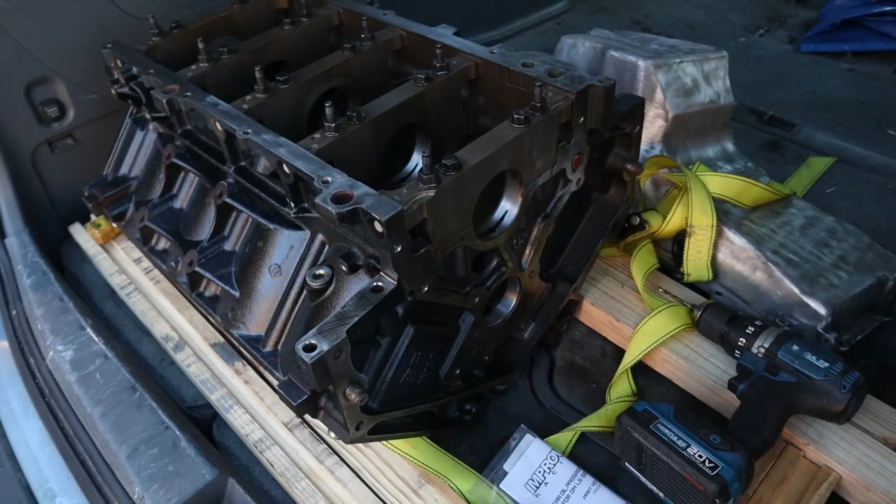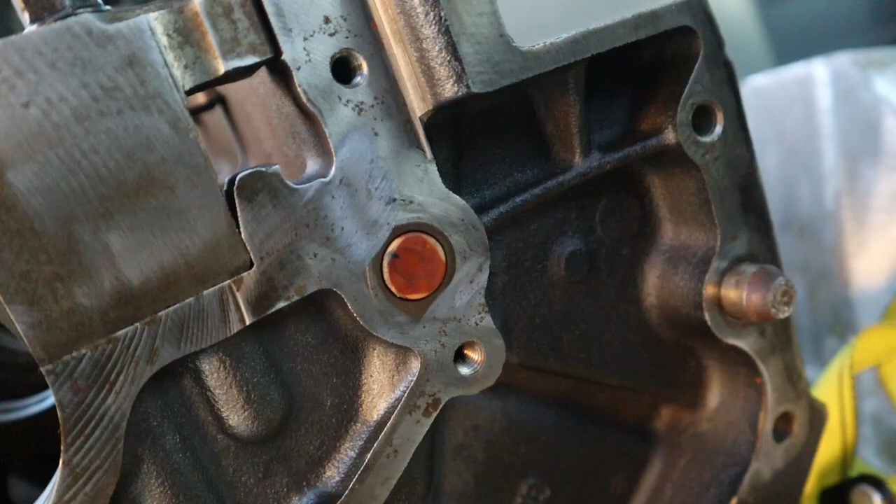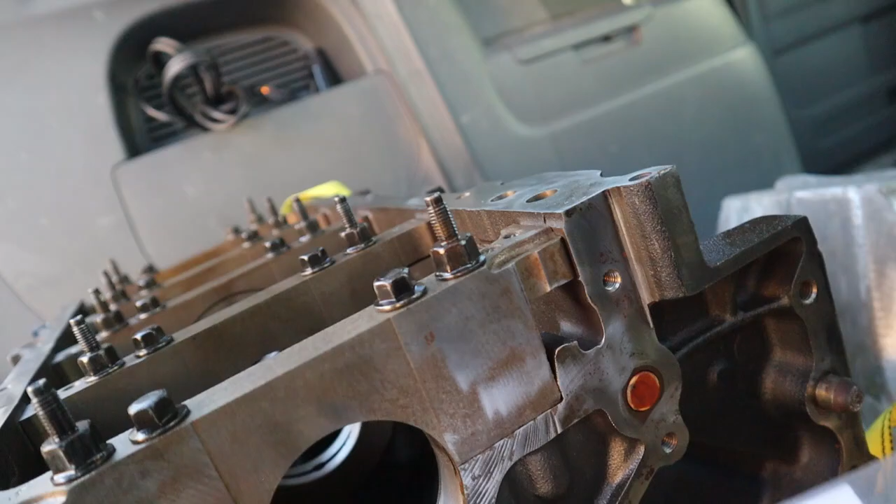As you can see, the block is sitting here. It's actually Friday, March 3rd, and you see this barbell here. I'm gonna take that out. I don't know if they replaced it when they refreshed this block and bored it out and everything, but I'm gonna replace this factory one, which is a good barbell, with this aftermarket barbell right here. Let me open it up for you guys and show you what it looks like and what it does.

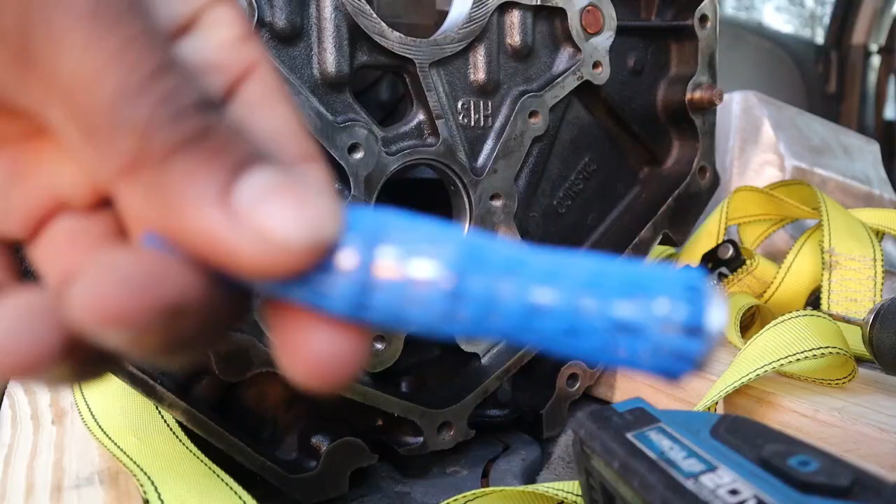Okay, so if it'll focus, there we go. This is the barbell here. It has two O-rings instead of just one that's in here. This basically helps the oil flow through the block and keep oil pressure inward, I guess. If this goes bad, then you'll lose all oil pressure.

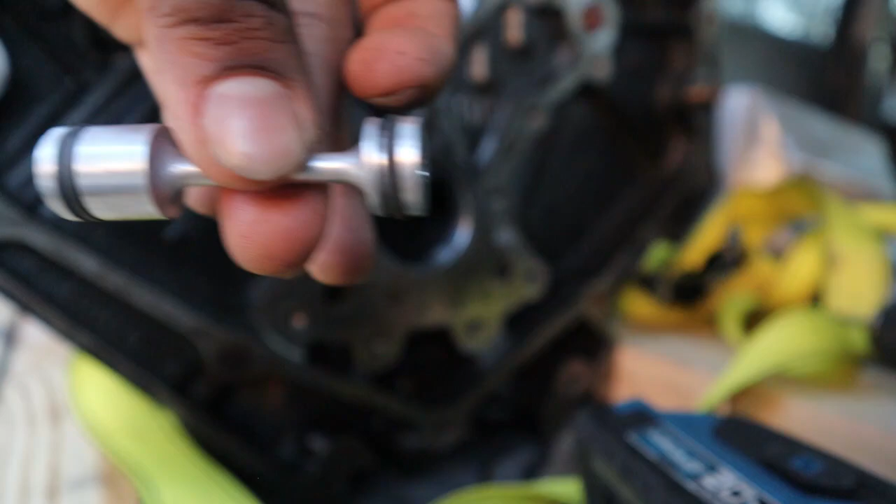I'm gonna oil it up just a bit around these O-rings, and we're gonna slide it in like that. It's gonna go in the block like that. Now first...

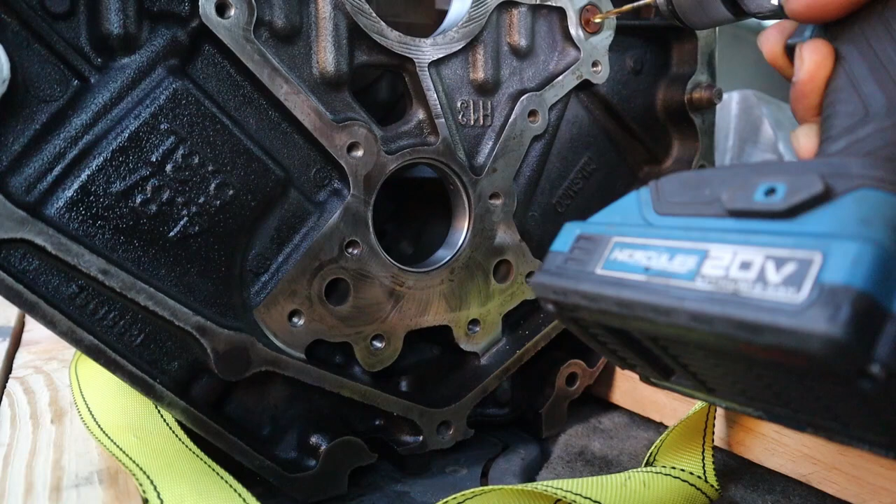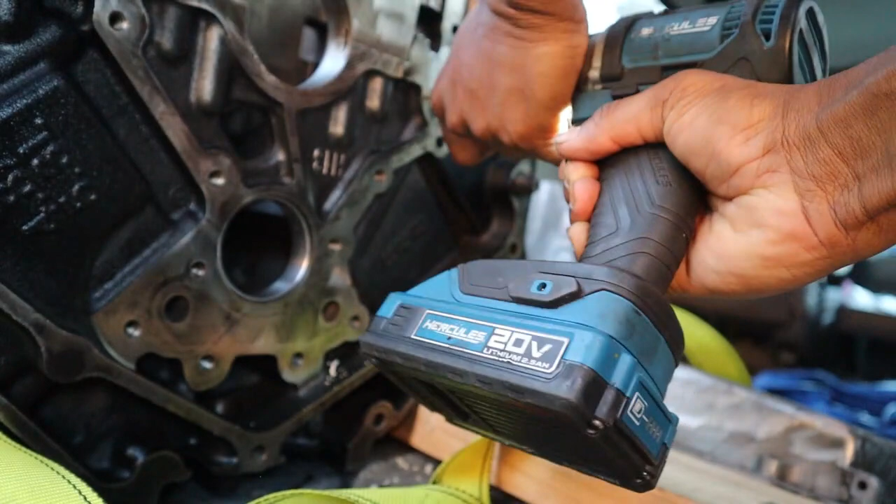Before we do that, we're gonna take this old barbell out using a drill bit. Here we're just basically gonna drill this in, and then we're just gonna kind of slowly shake it outward. So that's what we're gonna do. Okay, take this out. Come on, come on. There we go. Just shake it side to side, and it comes on out.

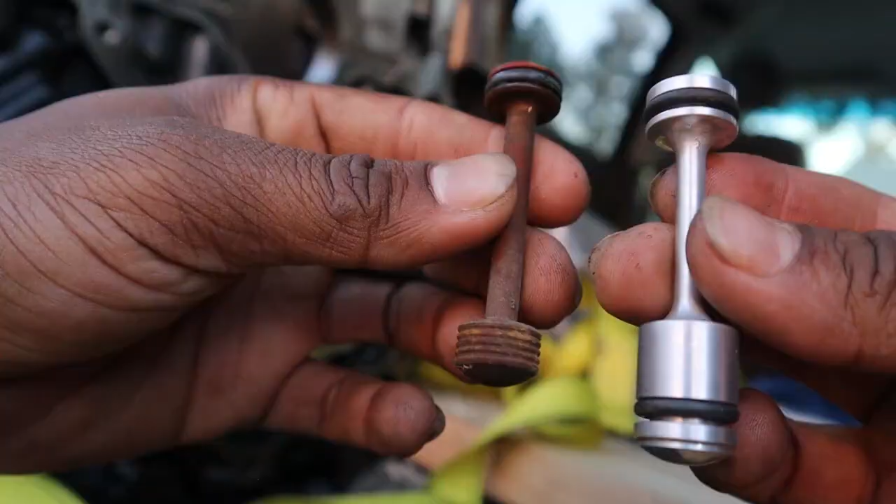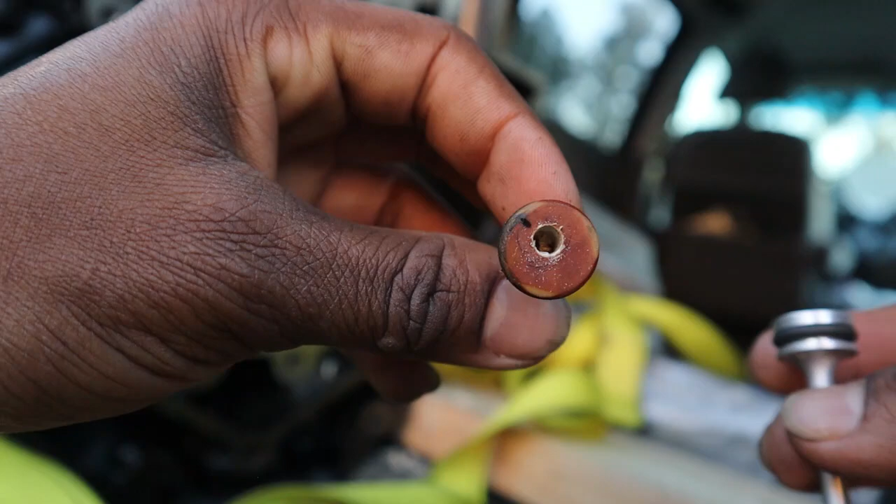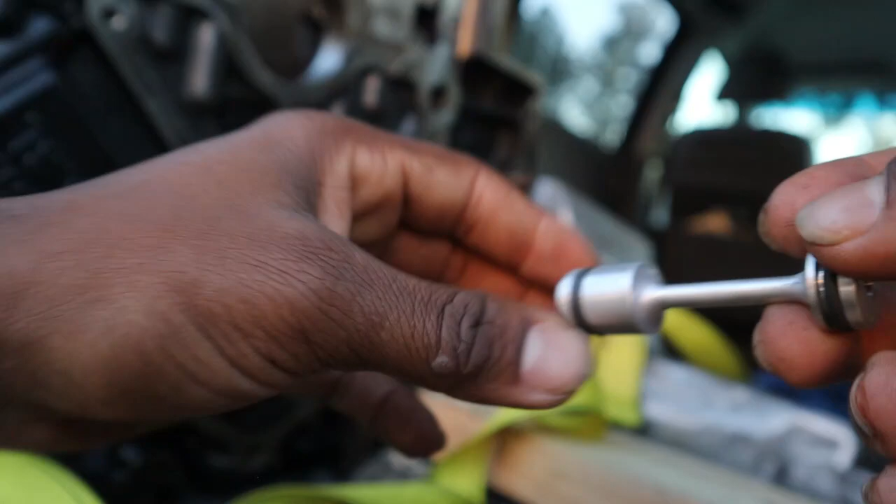There's the difference there. When you're rebuilding an LS engine, you might want to do this anyway, just for better oil scavenging, I guess, and whatnot. You see how I drilled a hole in this one. This one already comes with a hole in it with threads inside of it, so you can put a small bolt in there and screw it on and pull it out with some pliers or something, without doing this from the factory. So yeah, let's put this on.

Okay, we're gonna put the new one in. Sometimes these things are super tight to get on there, but this one's doing good so far. There we go. And that's pretty much it, guys. So let's continue with the video.

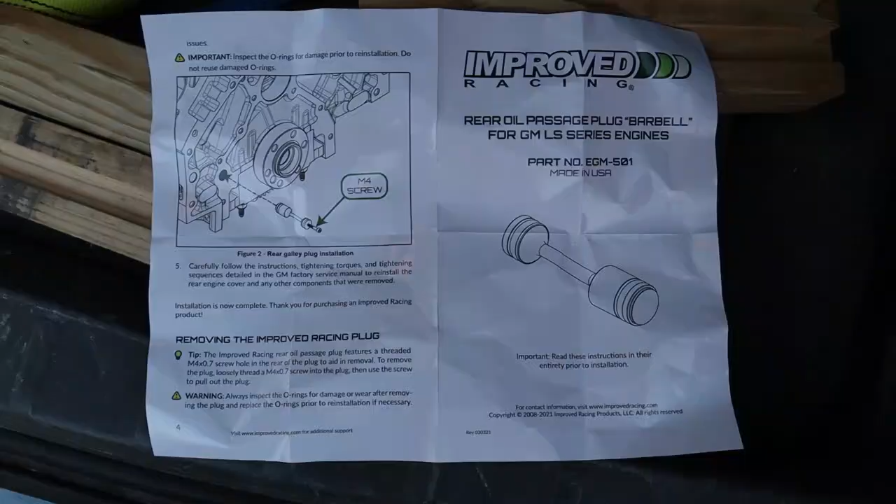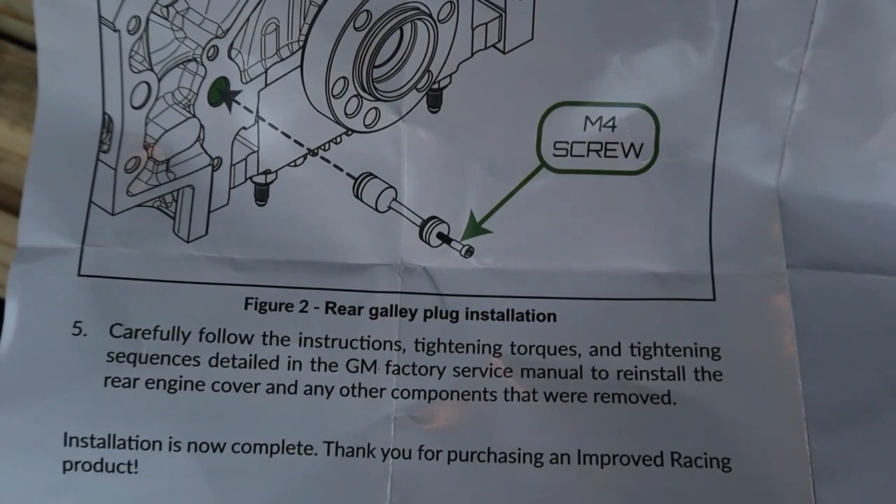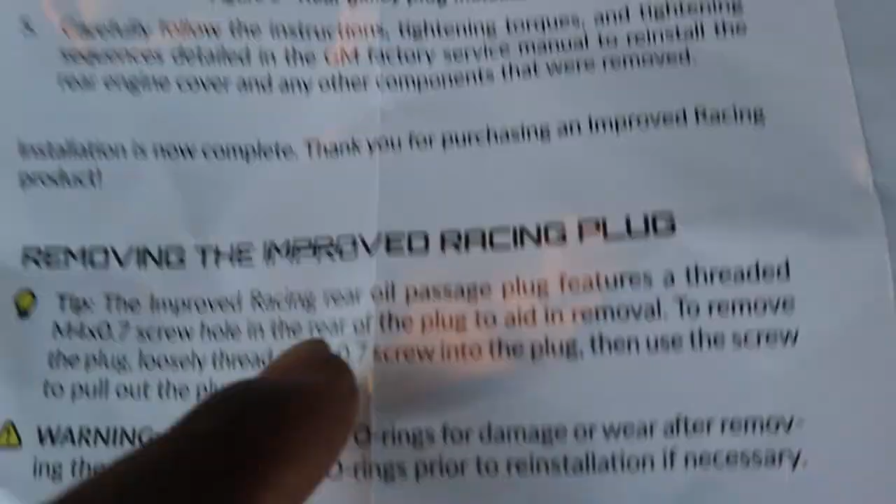I forgot to show you guys that they give you instructions too. Here's a picture of it, the way that it goes in. By the way, this is the back of the block here. It says rear oil passage plug barbell for GM LS. Get you to read that. You can pause the video if you want. And they show you what type of bolt you need to screw on that barbell there. So let's see, there's more information. I'll get you guys to look at that.

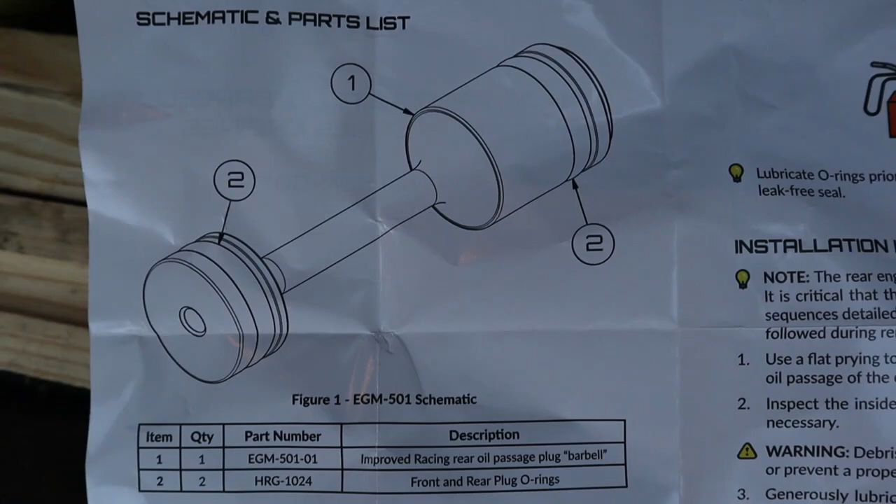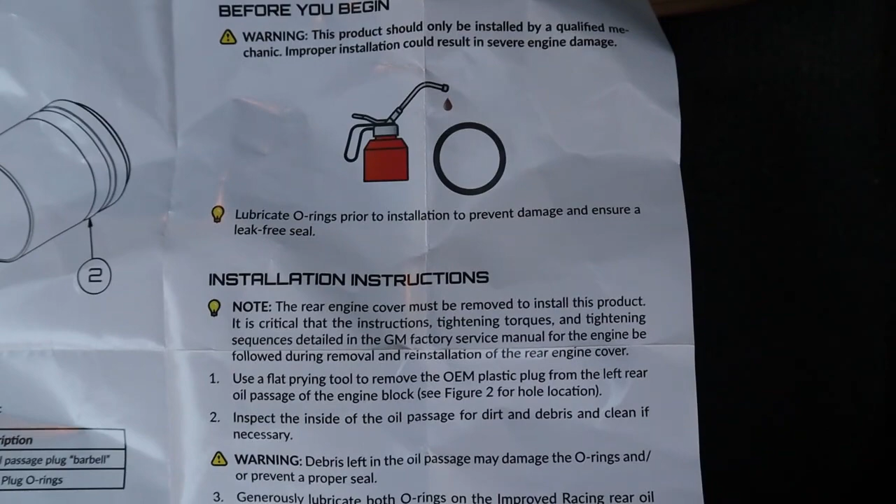Okay, and then I already, like I said, I put oil around the O-ring before I installed it. I actually put break-in oil from O'Reilly's and placed it on the O-ring. That way it doesn't dry up or anything, or have a dry startup or anything like that.

So yeah, greatest hits here again. I'm back after a little over a month. It's been hell for the past month or so, just trying to get the block over there and everything else, which is the easy part. Getting it inspected, honed, and bored, or whatever, and all that. So this is my new slash used block that I bought from the machine shop.

The other one that I bought off of Facebook, that block was cracked when I took it to the machine shop and they got it all cleaned up. They noticed the crack, and it was ruined. They couldn't fix it. It was on the deck surface here. I believe it was on the driver's side, on this side. So... I was not happy about that.

So I took my cylinder heads back. I just got them cleaned up. They're not ported or anything, but just got them cleaned up a little bit, and I'm just gonna wait on that, since this build is going to be kind of slow. I just want to make sure I'm doing everything right and that I'm not screwing nothing up, which I might, but that's part of learning and part of doing an engine build for the first time.

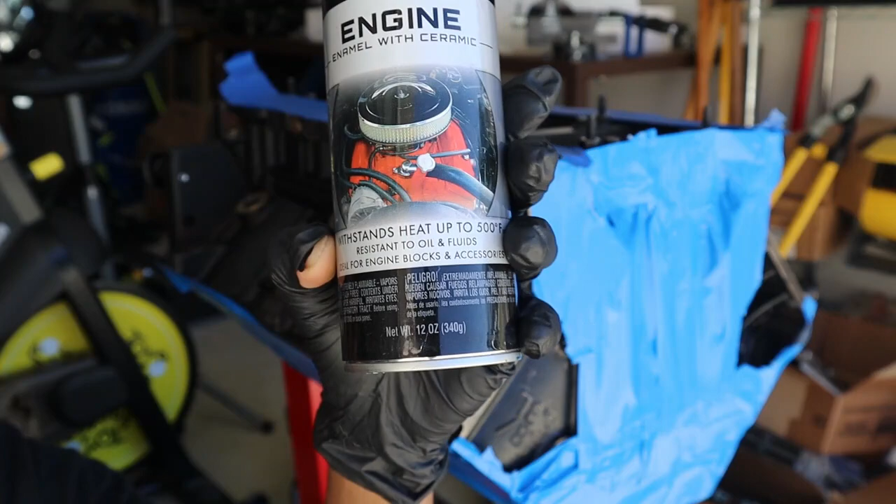I was looking for some other blue other than Ford blue because, you know, I don't particularly care for Ford stuff unless if it's Mustang or Ford GT or anything like that. Anyways, this is what I'm using - I bought this from O'Reilly's, and this as well. So that's what we're going to be doing.

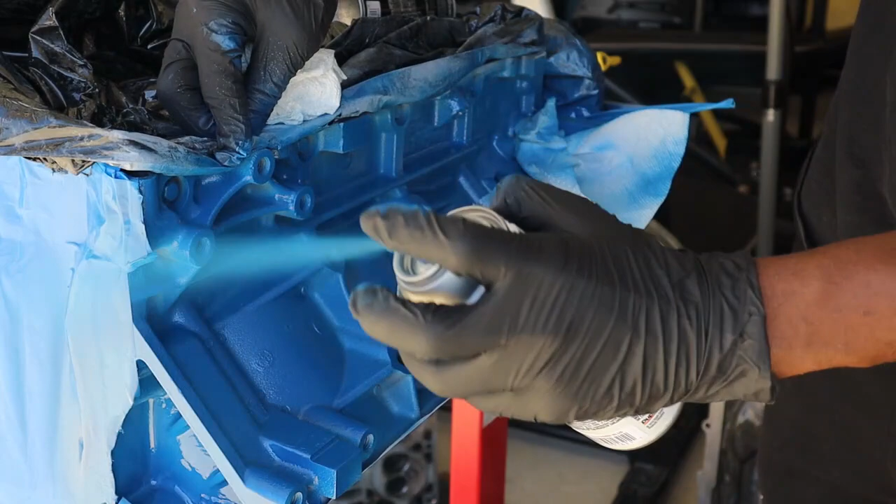So we're pretty much done here. I'm gonna go ahead and take all the tape and everything off. I know I didn't paint the back of the engine. I'm probably gonna do that later. I don't know when, but it's kind of hard painting the back of the block in the first place because you got all this going on back here with the engine stand. So I'll worry about that part later, and I may have to paint the top part of the block down here since I covered it up. But we'll just see how it looks and take care of it later.

But for now, let's take all of this off and see what it looks like, because it looks really, really freaking good, and I'm very excited right now. Of course, I'm going to take a lot of this paint on here on the deck of this block underneath off. I'm going to take all this off and clean it. I'm going to keep that paper towel in that hole there.

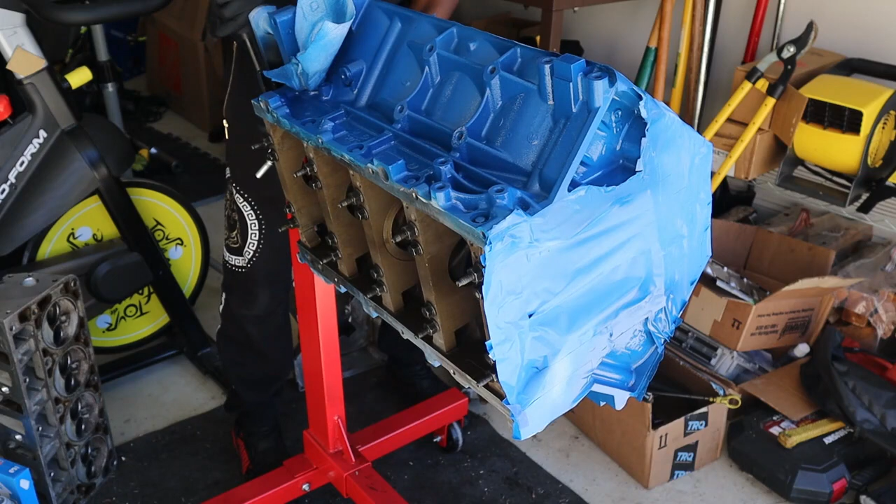Put this engine over. Take all this tape off.

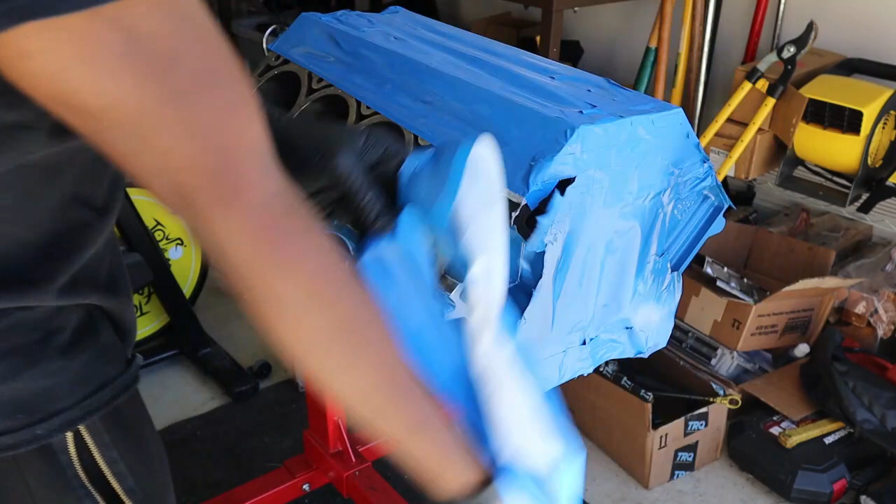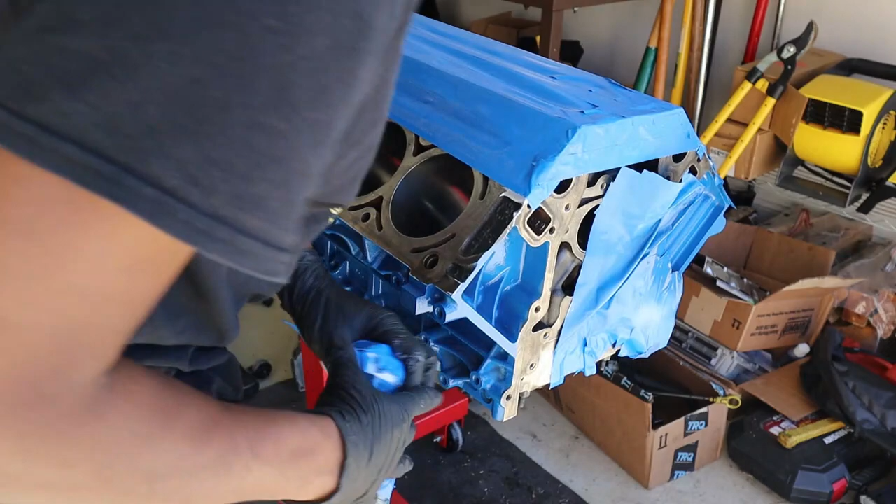You're not really going to be able to see this anyhow because the timing cover is going to fit over here and a lot of other stuff, so I don't think I'm going to paint that at all. And so far it looks phenomenal. I'm just taking all this off.

Man, it just looks phenomenal in this blue paint. Now I'm super stoked, guys. I'm trying to contain myself, but I think I did a pretty decent job for what it is.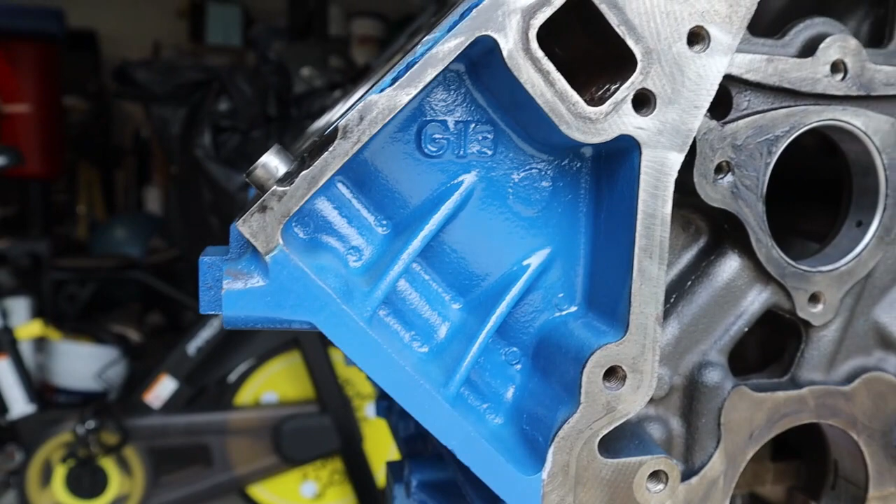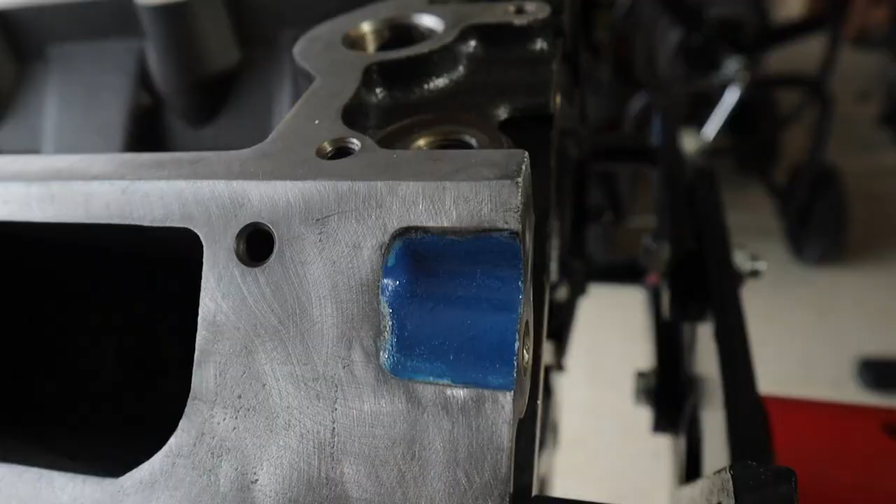Yeah, I still got a lot of work to do. The only thing that I don't have right now is the cylinder head gasket and the valley plate gasket. I don't know if I'm going to be running knock sensors anymore because I'm going to be making a lot of power. I'll probably put the knock sensors somewhere out here like I see some guys doing on their engines. I need to get a camshaft, lifters, and lifter trays. I got all the sensors for this engine, so I do have that.

What else, guys? I need to get my cylinder heads checked. I might port them, but they're 862 heads, and when you're making a lot of boost you don't necessarily need ported cylinder heads. You can run your stock heads with ARP head bolts and some other supporting mods to hold all that power, torque, and boost. So I'm probably just going to get them cleaned and polished or whatever. So yeah, I pretty much have everything else except for the top end of the engine, the lifters, and the cam.

I don't have valve springs. I don't have rocker arms. So yeah, it's a lot of crap. I don't have an oil pan gasket either, and I don't have an oil pump here. So yeah, it's just a lot of crap that I need to get.

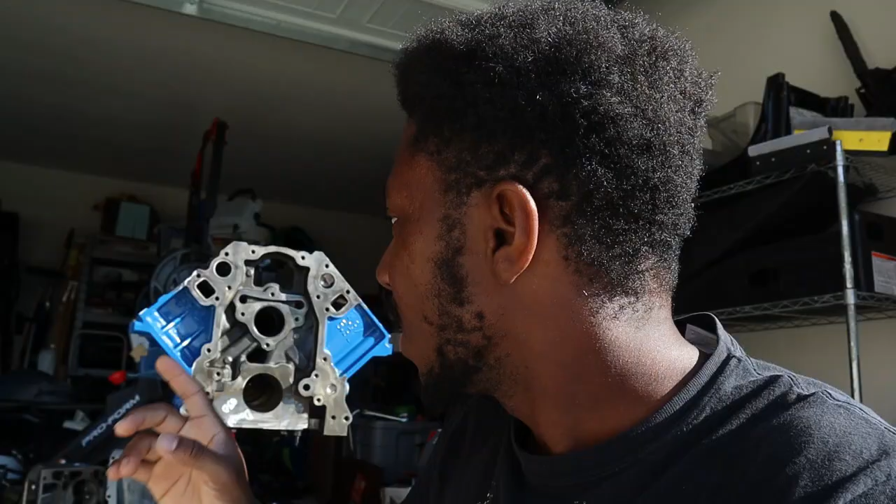Like I said, I'm just gonna kind of clean the deck surface of the block because there's some surface rust after sitting for a little while. It doesn't take long for iron blocks to rust, so I suggest you keep oil on it and in it, that way it doesn't rust. And cover it up with a black bag or whatever you have to keep the engine from rusting or having some water sitting somewhere.

But once I get just about almost everything for this engine, as far as the short block is concerned, I'm going to go ahead and put it together. I'm going to take an air chuck and just go through every single hole in this engine, that way there's no water in it, because water does not compress. And when water doesn't compress, it cracks the block and breaks all kinds of stuff. So make sure there's no water anywhere at all when you're doing this.

So I don't know why I'm talking about all of this, because it's just me painting my engine, but I'm really excited that I got this part done and it looks good.